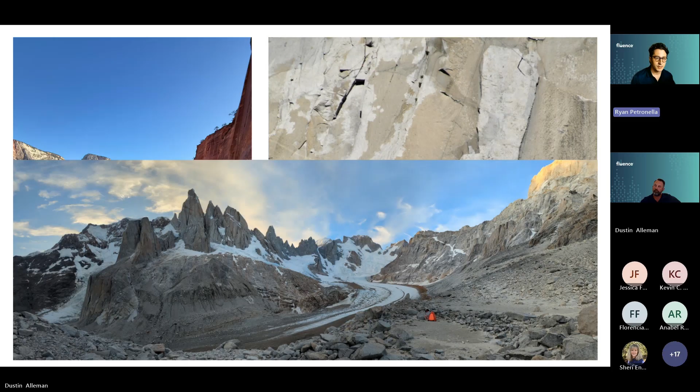The next picture is from down south, Patagonia, looking at Cerro Torre in the Torre Valley. I spent about a month climbing there in January a couple years ago. Next we have a picture from Chamonix, doing an alpine climb with Mont Blanc in the background. Finally, a picture of my girlfriend Lana and I from last summer with the Chief in Squamish, Canada, in the back. I really enjoy rock climbing. It's taken me to a lot of awesome places, and I know everyone on this call has their job, but outside of work, I find climbing really fulfilling, and that's what I enjoy doing.

Thanks, Ryan. Well, Ryan's a hard act to follow, he's kind of working on Most Interesting Man Alive, so I'm a little more boring. I'm a girl dad, in my dad era. Most of my time is spent doing kid events and sports. But when we do get free time for a vacation, we generally go to where my in-laws live, down in El Salvador, and get to enjoy some fishing and activities down there, which we don't get to do as often in Tennessee. So nice to meet y'all.

So we're here to talk about the MABR. I thought at the beginning of this webinar it would be best to try to explain it as a product, and then we would work our way into a solution.

The MABR that Fluence provides utilizes a flat sheet membrane. In this picture on the right, you have the flat sheet laid out, a little over 850 feet of membrane laid out on the ground. What we do is take a membrane, cover it with an air spacer, and put another membrane on top. We weld it together around the perimeter of the sheet to create a void for the air to pass through. The air will eventually diffuse into the wastewater, and we'll get to that in a bit.

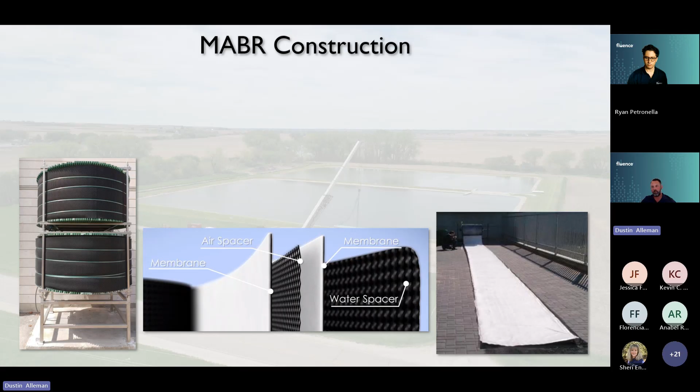So there's going to be a little bit of a recurring theme on my side. I apologize, but I want to make sure that if I get anything right out of this, it's that you hear the word membrane.

Initially, most folks know what membranes do, and those are used as filters. They're used as ways to physically create a barrier to promote inlet water of some quality to an effluent water of almost pure quality.

In this process, we're not doing that. I mentioned before, we're putting air inside that sleeve that we've created with that air spacer, and we're using the membrane as a surface to promote biofilm growth.

The biofilm that we're growing is a nitrifying biofilm. It only grows to roughly 200 microns at max, and it doesn't have the stability to continue growing. So we end up with a condition of a membrane application that's a terrible condition in the traditional sense, where it's covered in biofouling, and that's exactly what we want, versus the traditional method of a membrane needing to be clean.

So with that growth that we're promoting, it's a controlled condition for the thickness, and a main point operationally speaking for the membrane is that there's not an intent to need to clean it. There's not a maintenance mechanism to this.

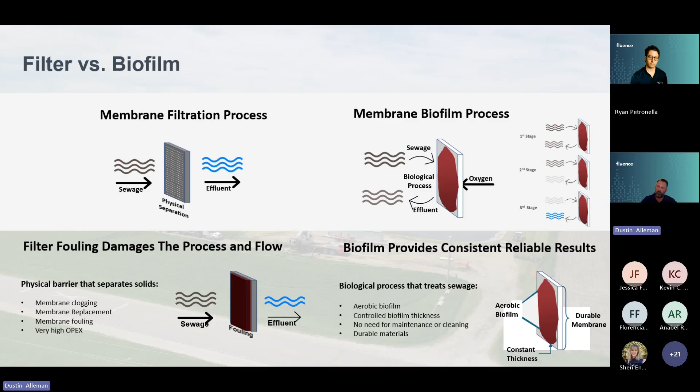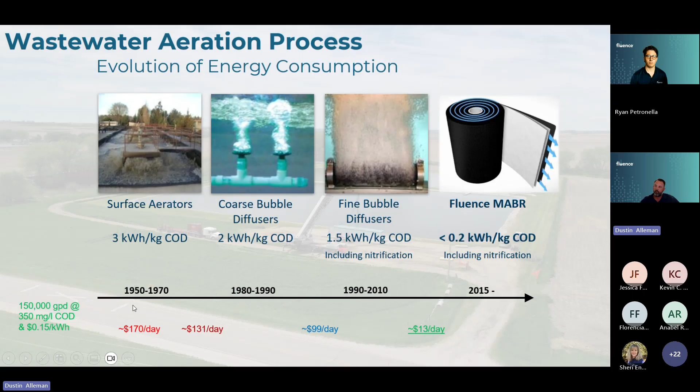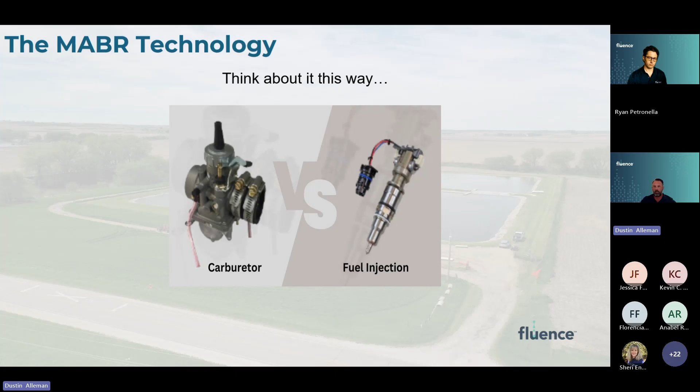So we went over the components of how we put this together. Part of what we should also go over is how the air flows through this. As I mentioned, we have the membranes, we have an air spacer, we have the water spacers. They're wound up into what we call a sushi roll here.

We're introducing air on one side of that sleeve and letting it exit on the other side. It's a very low pressure scenario - we're less than 1 psi within those membranes.

A key to the low pressure is that airspace that goes in between, because we've now physically made a void with that airspacer where no matter how deep we're submerging these towers, we don't need to overcome the hydraulics of the mixed liquor we're putting them into.

I did mention that there is intermittent scouring that goes on to displace all the fluid that's been treated with fresh, raw water, kind of like an airlift, just replacing with water that needs to be treated.

So we are growing our nitrifiers directly on that membrane face, and we get into a differentiator from an RBC technology where you're growing a heterotrophic biofilm that requires frequent cleaning and gets lots of buildup, versus a stable environment that's not intended to be maintained as long as you're following the treatment targets.

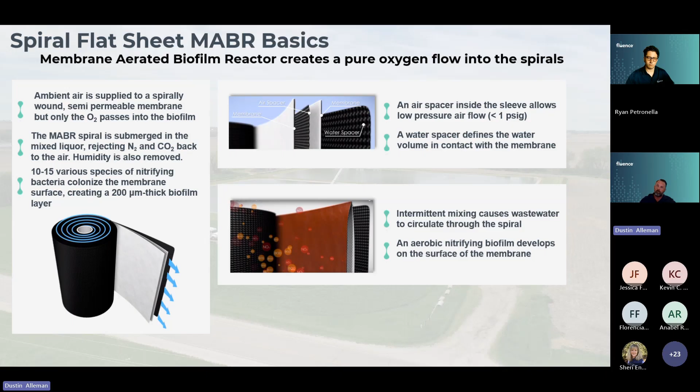Just a quick little visual. If you look at this line here, that would be the membrane face, and if you can imagine there's another one on the other side, so you can see the oxygen flowing between those two sheets of membrane.

We're growing a biofilm here on the face that's specifically for nitrifying ammonia. That ammonia is now going to be converted into nitrate in our suspended mass, which is where our heterotrophic growth is. And from the nitrate, we're converting the BOD as a carbon source to make the nitrogen off gas.

So on the membrane face itself, we're taking care of all the nitrification, and once we get into the suspended mass surrounding that vessel, we're getting into the denitrification component. So we're able to achieve both within the same basin.

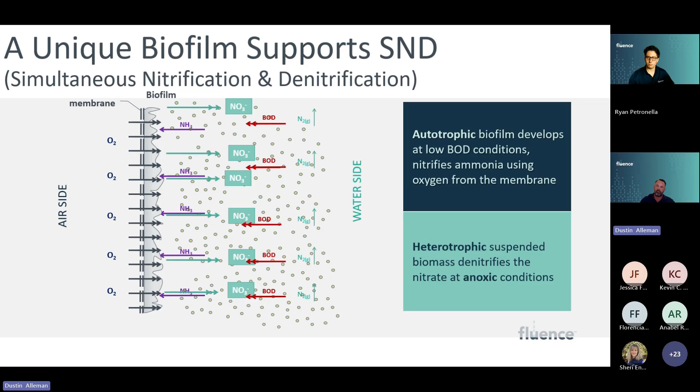It's an interesting technology because there's a simplicity factor to how this works and how we apply it to the MABR plus the low DO process. But what it does allow us to do is be pretty flexible on the way we apply it, whether we're applying it to a package plant, to a large conventional plant, or as a side stream treatment.

The MABR itself is the primary mechanism for that nitrification piece, and the supplemental processes we do behind it are where we get our denitrification. But it allows us to fit it into a bunch of different types of application variations.

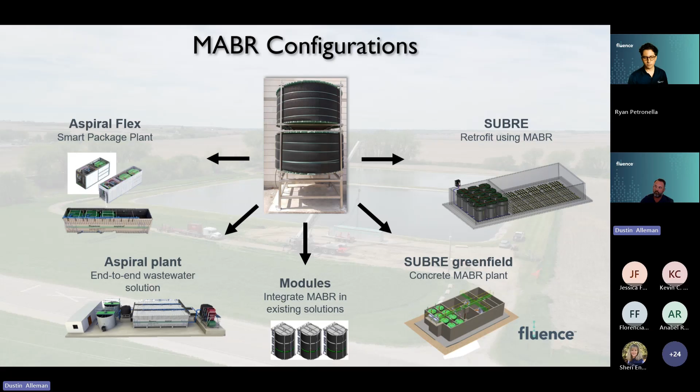Laying out a general overview of the process - depending on how much phosphorus you're needing to remove is kind of how we select this anaerobic basin. Not dissimilar to a lot of other technologies where it's a time mechanism, but what differentiates it from other options is we've removed all the internal recirculation streams aside from the RAS, so there's no internal nitrate recirculation, which does allow for the protection of this anaerobic zone from getting commingled nitrates introduced to the EBPR process.

But from that point, it's anaerobic. This MABR zone is anoxic, and then you have your aerobic zone. That zone, particular to the Fluence process, we're running at a low DO to promote that denitrification and the remaining nitrification needed.

And the point where we decide to stop adding MABR towers and go to fine bubble diffusion in the zone is really just an economic choice, where the MABR's cost is outweighed by the efficiency of the fine bubbles following it.

From an operator standpoint, while it's in the field deployed, this is very similar to a normal condition at a conventional wastewater plant. The way it's flowing through, there's not a lot of levers for someone to have to operate and need to configure, and you're not in the position where you have 10 different variables where you need to make your adjustments.

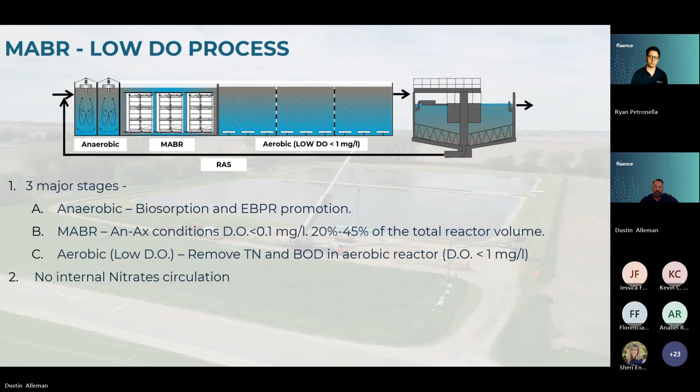What's also interesting about this, since it is a simplified process, is we're able to containerize a lot of these technologies and use them as building blocks to go after applications in a different way, where a small application can get at or a little below 2,000 gallons a day out of a 20-foot container. You have an entire treatment plant that fits within that small container, and you work your way up into different sizes for different flows.

We've taken a modular approach where we can break out different variations of application, being more agnostic to what does go in, whether it's a clarification process on the back end, putting an MBR on the back end, or the amount of towers we need within these basins. This large MABR can have anywhere from 1 to 5 towers, and the medium size can have 1 to 2. It allows us to be extremely flexible per the application.

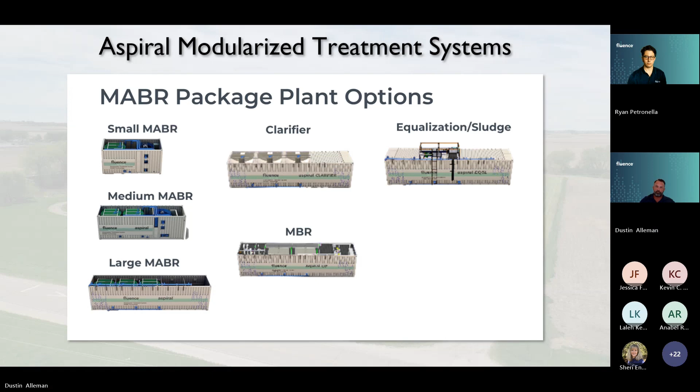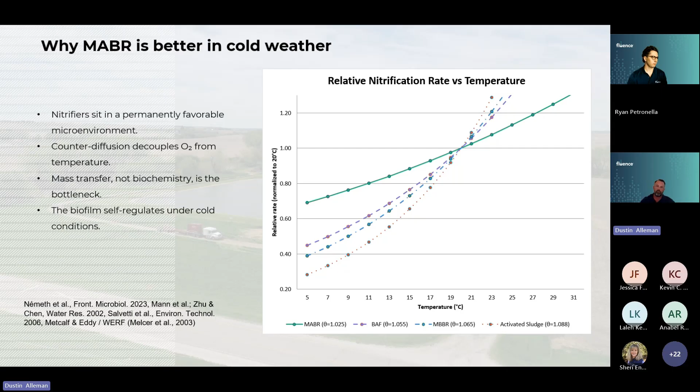As conditions change, with a quick warm up or cool off in the water seasonally, you're not having to make large adjustments constantly to chase the temperature up or down. It's more of a slow, controlled movement through it.

On the product side, the big things to note for me are that when looking at an MABR, the membrane mechanism is a diffuser, not a means of filtering. The nitrifying biofilm is a stable, controlled growth that doesn't require cleaning or create operational challenges, and there's stability of the treatment method across varying temperatures.

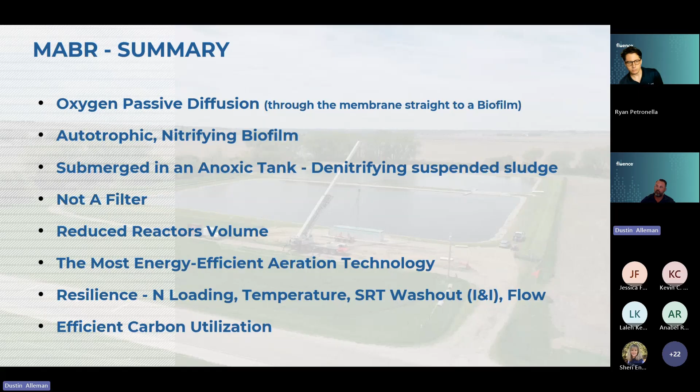I'll hand some of this off to Ryan now.

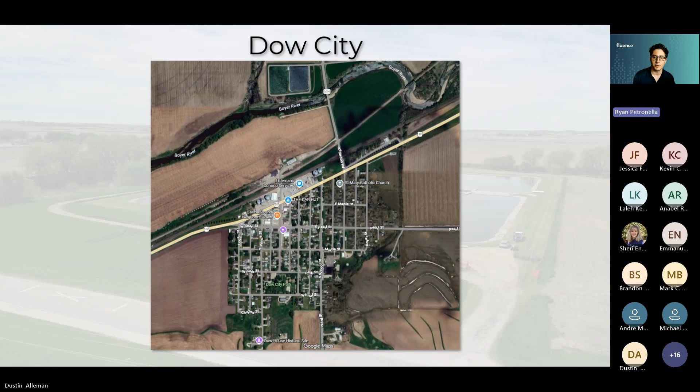Thanks, Dustin. So we wanted to present a case study today. We're going to talk about Dow City, which is a small town in western Iowa. For those not familiar, it's a small point on a map. The town's just under 500 people population, but they had some treatment challenges with new updated flows that we'll review.

The problem we have in Iowa specifically is that Iowa has the most wastewater lagoons out of any state in the U.S. Of more than 700 lagoons in Iowa, 500 are controlled discharge lagoons, discharging twice a year, typically spring and fall. 200 of those are continuous discharge, discharging year round.

The challenge Iowa's facing in particular is that most of these lagoons were designed specifically for BOD, TSS, and pH, removing those constituents and regulating pH. The DNR a few years back mandated new requirements that included ammonia and E. coli, and the problem was that most of the solutions out there are very capital intensive.

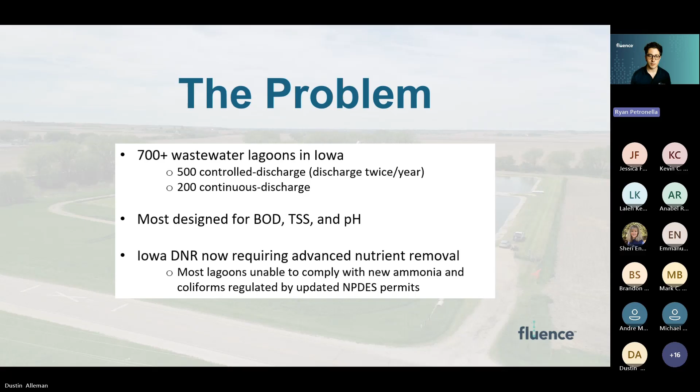And this city, Dow City, we were just talking about, is a small town with a small population. A lot of these rural towns simply can't afford these large capital intensive solutions that are out there. So let's go over the basics of a lagoon.

For those unfamiliar, your typical lagoon is basically an excavated hole in the ground. It's older technology for wastewater treatment, relying on wind or air, in addition to photosynthesis from algae producing oxygen, to introduce oxygen into the wastewater. The wind moves across the water, and the algae takes sunlight and converts carbon dioxide into oxygen. That's how a lagoon introduces oxygen into the system.

You then have aerobic bacteria working to remove the BOD from the system, and typically these lagoons have long retention times. Dow City has 2 cells in its lagoon, each sized for about half a year's worth of retention time. So basically you're requiring long retention times in order to remove that BOD.

The challenge is that with these new updated ammonia requirements, what we're seeing is that a lot of these lagoons are failing, specifically in the wintertime, failing the ammonia removals now required by the DNR.

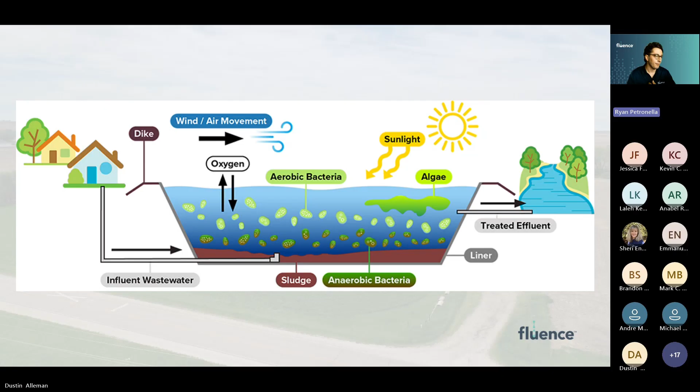I saw that Nathan was on the call. Nathan Seberg, he's in the bottom right corner. Him and Craig basically brought us this project a few years back.

We met Dr. Craig Just at a WEF conference. Craig was given a grant from the state of Iowa to pursue alternative options and look into new innovative technologies that could be a solution for small towns like Dow City. With the help of Nathan, who provided a lot of these photos, he helped with the installation.

We've basically been piloting this technology in Dow City for the DNR's approval, which we actually just heard recently that the facility plan was accepted in Dow City, and we're excited to be one step closer to gaining our full approval of this technology in Iowa.

Next slide. So again, the cost issue was a problem. We had ISG, who's a large consulting engineer in the Midwest, take a look at this project.

When they were looking at costs for Dow City, they analyzed our solution against two other solutions, a submerged attached growth reactor, as well as a covered aerated lagoon. And as you can see from that table, we came in significantly cheaper from a capital perspective on installed cost, on what that would look like to basically provide this town a solution.

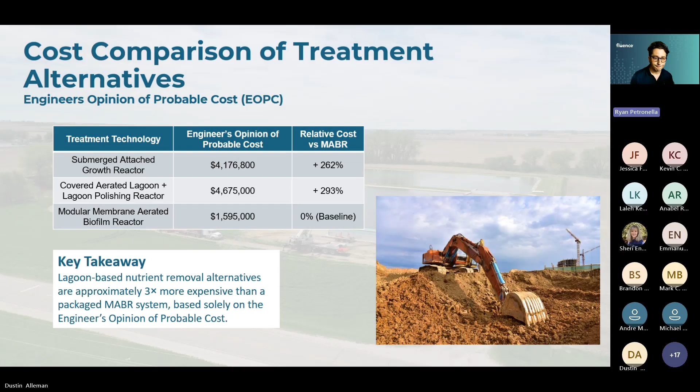All right, next slide. So the system that we have installed at Dow City is an Aspiral M2 Plus. Just a quick note on the nomenclature there. M stands for medium, so we have our S, M, and L series: small, medium, and large. The M series maxes out at around 30,000 gallons a day hydraulically.

The 2 denotes that there's 2 MABR towers in that container, and the plus just means that we have a media filter on the back end. So for stricter effluent requirements, typically when we're targeting 10-10 BOD TSS, that's when we can include a media filter to achieve those effluent requirements.

Next slide. So real quick, we're going to just look through some pictures of the pilot that we have installed there, starting with the installation. Next slide. The idea of showing you all these pictures is just to showcase how efficiently and relatively easily we're able to install one of these systems.

You can see the 2-cell lagoon there in the left photo, and some excavators pushing dirt. That's at the end of March 2024. So just keep in mind that's sort of when we're beginning this install, at the end of March.

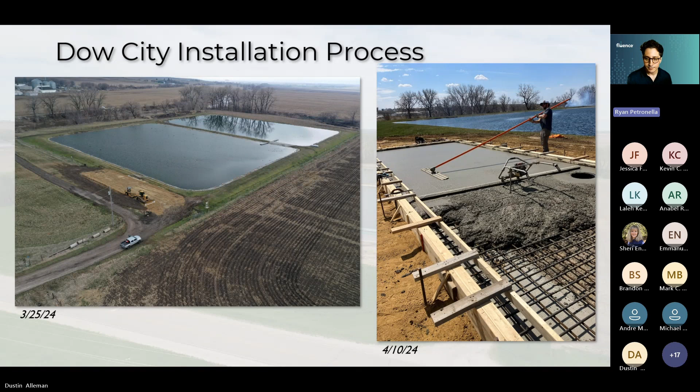We performed the lift early May, so just over a month after they started pushing dirt. It's a 40-foot high cube container. We do custom design and fabricate these to be watertight containers. These aren't repurposed freight containers that you might be used to.

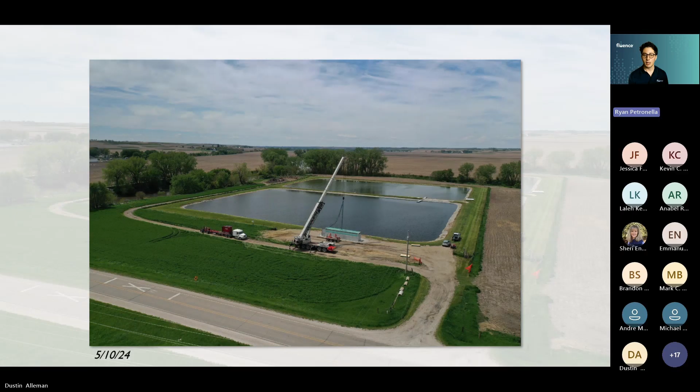But for a contractor, these 40-foot containers are easy to understand. Any contractor will understand how to perform a lift or how to move these containers around. Makes it really easy to do an install like this. Next slide.

It took a day and a half for them to construct a building. Because of the really cold weather experienced in Iowa, or for any application rather, it's important to think about protection for your operators and just protection of the equipment.

So the decision was made to basically house the container inside a building. This building went up in a day and a half. So really low cost building, but provides great shelter and great protection around the unit. And you can see there, that was the end of May. And now here we're at the beginning of June.

They've plumbed up the interconnecting piping. You can see the dock just off of the building, that's where the feed pump is located. And we're treating water early June. So that was basically end of March to early June. It's about a 2-month install for this whole process here. Next slide.

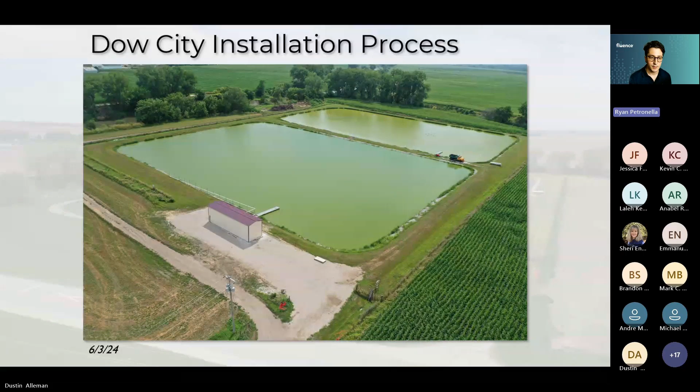Okay, so now we're going to talk about some data that we've received, and just show how we're able to effectively remove ammonia during the cold winters that Iowa experiences.

We started out with the startup, just leak and aeration tests, filling the containers with water, checking for leaks. That's just part of our startup.

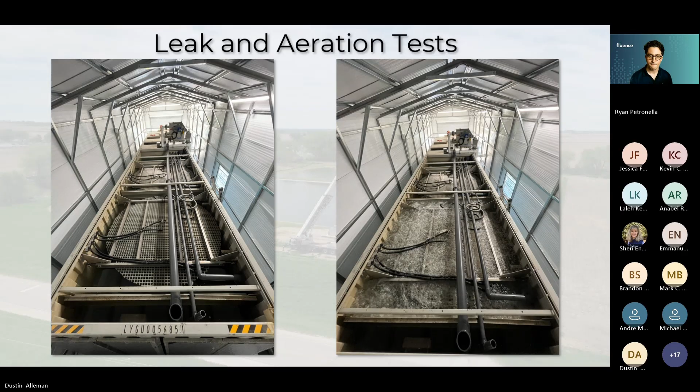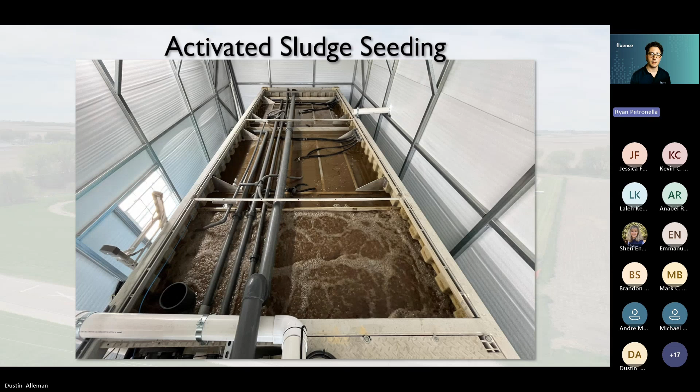We typically like to seed our systems with sludge. That looks like basically organizing a vac truck, working with some local municipal wastewater treatment plant, getting some of their activated sludge and introducing it into our system and recycling it. That basically introduces biology to our system. That biology will then latch on to our membrane and start to grow. That's where we start building our biofilm.

So you are what you eat. The idea with this is to show how we really have operated the Dow City pilot in two completely different biological ways. This first way we're going to talk about is a biofilm-only process.

The dock you see there is located at the perimeter of that lagoon, and these lagoons each receive fresh wastewater from an inlet pipe that deposits the water about in the center of each lagoon. So imagine, these each have about a half a year's worth of retention time. You're depositing that fresh wastewater in the middle of these lagoons. We're feeding our system from the perimeter of the lagoon. So there's a lot of time for that algae in the lagoon to basically act on the wastewater.

What we found initially treating the wastewater was that we had really diluted influent, really low loadings as far as ammonia and BOD were concerned. And basically what that resulted in is us operating in a biofilm-only process.

So you can see here, we just seeded the sludge. Our SSV was quite high, right around 700. But over time, because of the low nutrients that we were feeding the system, we actually lost our sludge. We lost our MLSS in the system. Two months after, in August, we essentially have almost a clear, zero SSV. We're basically just passing this semi already treated wastewater from the lagoon, from the algae, into our system.

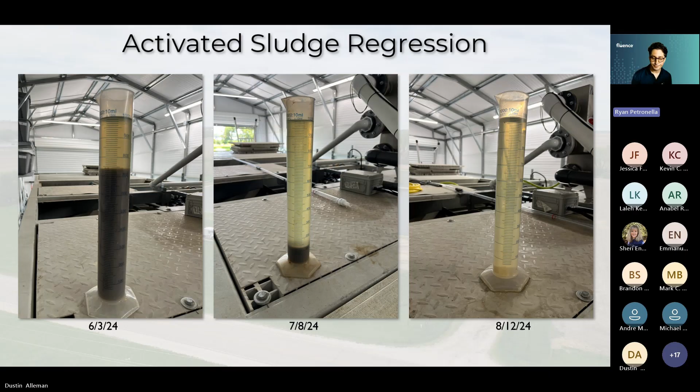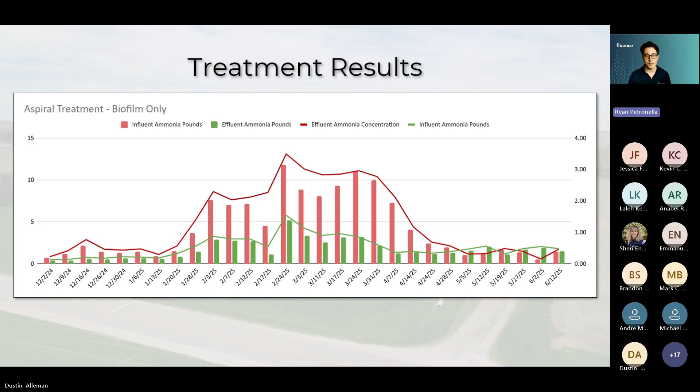What you'll see is that February, March are the coldest times of the year when this lagoon is actually under a sheet of ice. We have regularly really cold wastewater temperatures during this time. Ammonia, which again is not specifically targeted by that algae or by the lagoon, we're still introducing ammonia into our system at lower concentrations, but we're still seeing upwards of 10, 15 milligrams per liter of ammonia. And we're able to effectively remove that ammonia down to the levels required by the DNR.

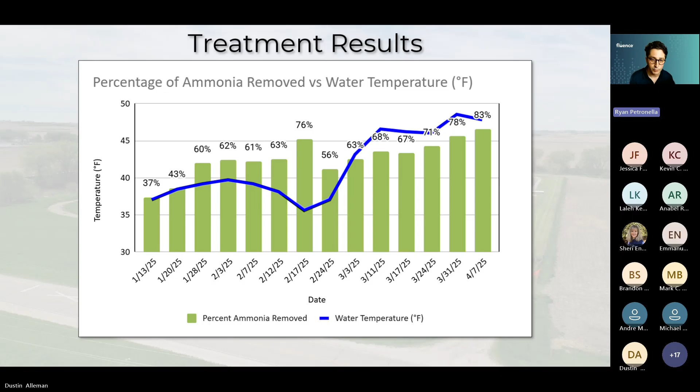After obtaining all this data, I had the idea of installing a baffle to essentially change the feed source. Earlier, if you remember, we had that dock right off of the container. The idea was, hey, let's try to obtain data and show the DNR that we could treat full strength waste. Since it was still a pilot, we could not pull directly from the influent lift station. So the next best thing we could do was try to intercept that wastewater while it was still full strength before it had the opportunity to interact with the algae and the rest of the lagoon.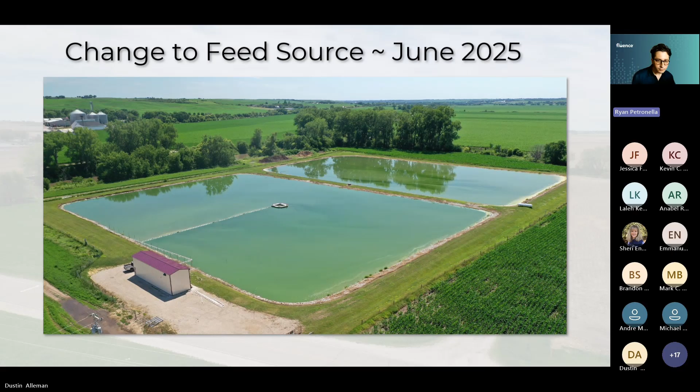That baffle you see in the middle is actually a floating dock with rubber sheets all around and a chain that holds it down. The idea was to position this over that influent pipe that feeds the lagoon system. So from earlier, when we were working with that biofilm-only process, now we have these feed pumps essentially intercepting the wastewater while it's still full strength, before it's been treated by any biology, and directing it straight into our system.

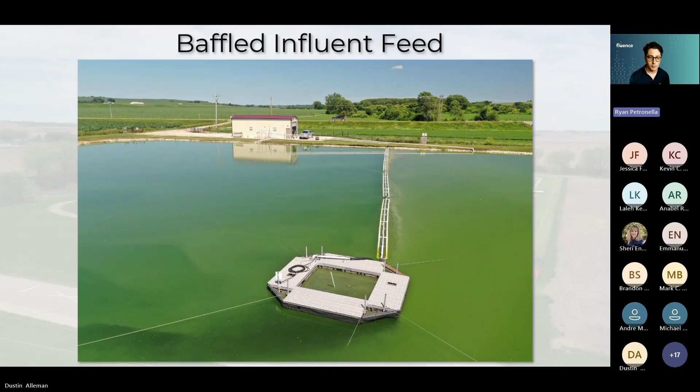You can see here just the black color inside that baffle. We found that this portion within the baffle quickly became anoxic or anaerobic. We're basically dealing with raw wastewater, so that's what you would expect.

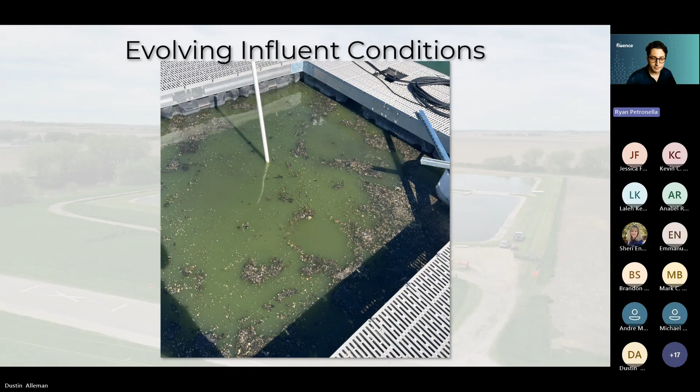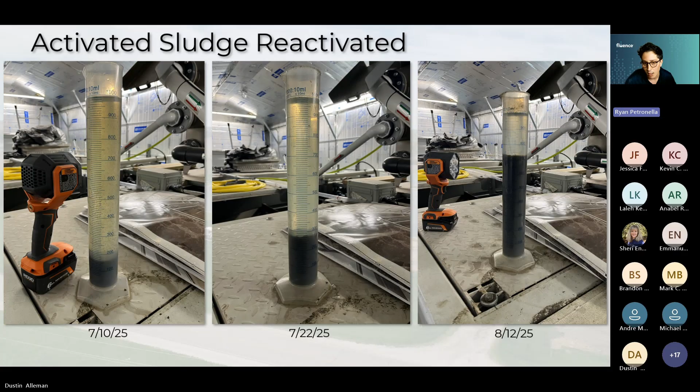After that baffle was introduced and we started pumping from the baffle, you can see over the course of a month we're now starting to build sludge back up into our system. We're going from a biofilm-only process to an activated sludge process. The SSV starting out mid-July is about 150, and by middle of August we're back up to around 700, 750.

Now with the baffle, we're actually seeing ammonia concentrations consistent with what you'd expect in typical raw municipal wastewater. And our ammonia concentrations in the effluent actually improve, in the sense that we're removing ammonia even better as an activated sludge system, which is how the MABRs were really originally designed. We designed the Aspiral systems to work as an activated sludge system. This was sort of a pilot for us, just to learn how it would look if we ran it as a biofilm-only process as well. So what we're showing on this slide is just how we're able to accommodate both those different conditions and still reliably remove ammonia from the system.

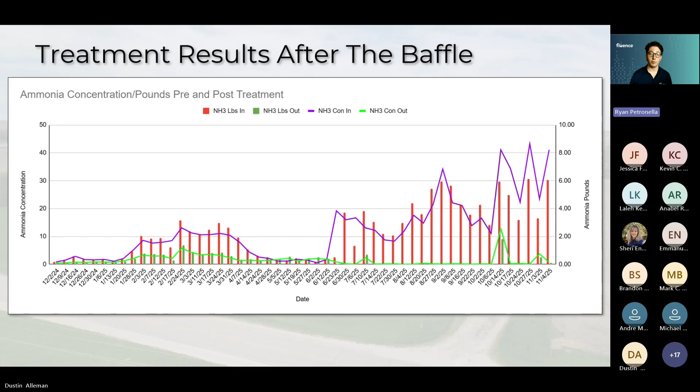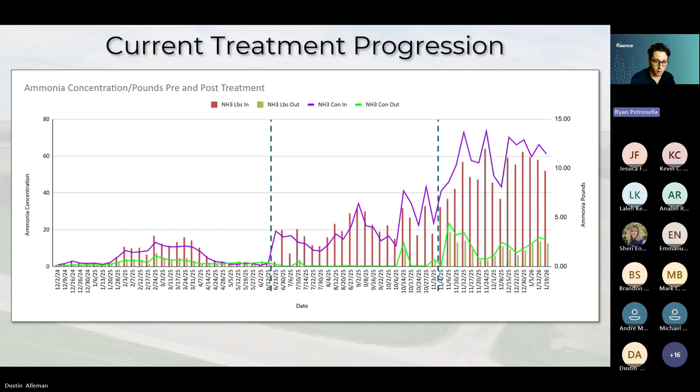At that point in November, the two dotted lines you can see here - the first dotted line on the left signifies when the baffle was installed. The second line in November is when Nate suspected the baffle wasn't quite positioned correctly, or might have been slightly off center from that actual influent pipe. So he went and moved it, and what you can see is we're actually, from November 25 on, receiving even higher levels of ammonia, all the way up to 60 milligrams per liter. So just three really different sets of data for different ammonia concentrations and conditions, but with all three of them reliably removing ammonia.

Finally, I just wanted to present some data we got back from the lab. You can see here that in addition to BOD and nitrogen, which is what our technology addresses, that's why we're pursuing this market in Iowa. I'm really excited about working with these lagoons to remove BOD and nitrogen.

We also are seeing that we're really removing pretty high rates of phosphorus as well. That's through this EBPR process, where essentially the bugs in our system are absorbing the biological phosphorus, and ultimately that ends up in your sludge and is removed from the system when you remove your WAS. We basically have data here to show that we're able to consistently remove BOD, nitrogen, and phosphorus in a variety of different conditions.

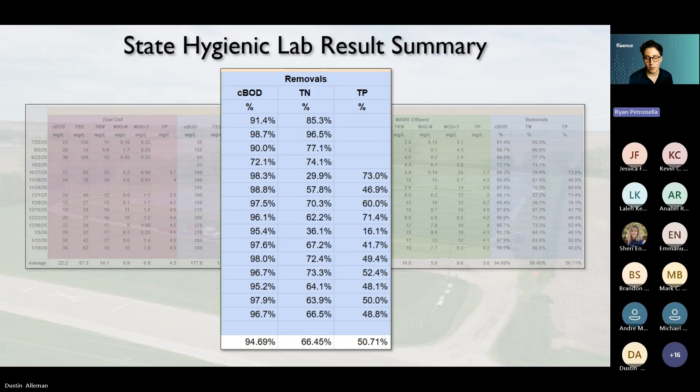All right, back to you, Dustin. Okay, thanks, Ryan.

From a power consumption perspective for the application Ryan was just reviewing, what we really drove down to on this was we're roughly about $5 a day average for this 30,000 gallon a day plant. So to make an analogy for the power consumption, you're looking at similar to a single family home to run this plant. Really, the uptick in power usage has been attributed to just turning on the heater in that building.

To get that room above freezing - it's not a room that's kept up to a normal temperature like inside the house, but we do need to stay above freezing. We've made an analogy to a higher utility rate since Iowa does have lower energy rates, but it's still under $10 a day.

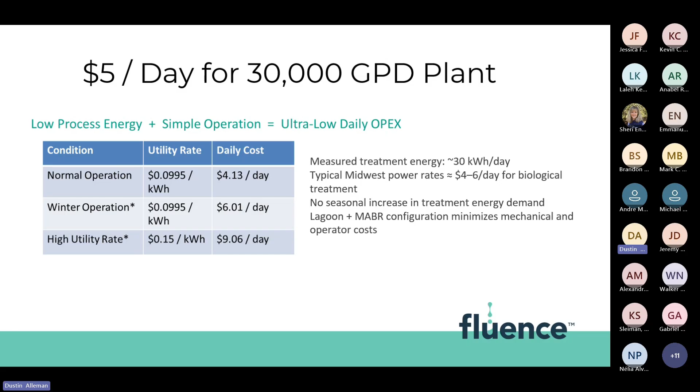From the perspective of temperature, we've got a write-up that Black & Veatch has verified some of our treatment approaches at one of our larger conventional plants in Israel. One of the key things that came out of this review, which they've tabulated here, is the reduction in volumes for reactors and clarifiers. Some of the magic of the MABR is the reduction in volumes required to perform the treatment.

At 15 degrees Celsius instead of a 7-day SRT, we're drifting to 5. When we get to a higher temperature, kind of on that chart I showed earlier, as you go up in temperature, the technologies become near par for nitrification processes. It does transfer over to the bioreactors and clarifiers as well.

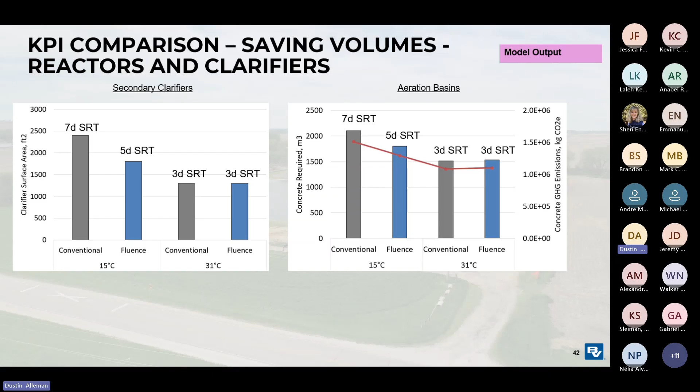What doesn't go away is the energy savings. Similar to conventional wastewater treatment, there's a stability between seasons of cold to warm, where you're using similar amounts of energy to perform that treatment. But what you do see is the stability and reduction of energy using that MABR.

Coupled with that low DO process, we get the full energy savings, where we're reducing the bulk aeration, replacing some of that bulk aeration with the process air that I talked about before—the air we're pumping through the membrane that we already discussed. But you also can see a very significant removal in pumping, and that's part of the internal recirculation loops that we're able to remove from the treatment process entirely.

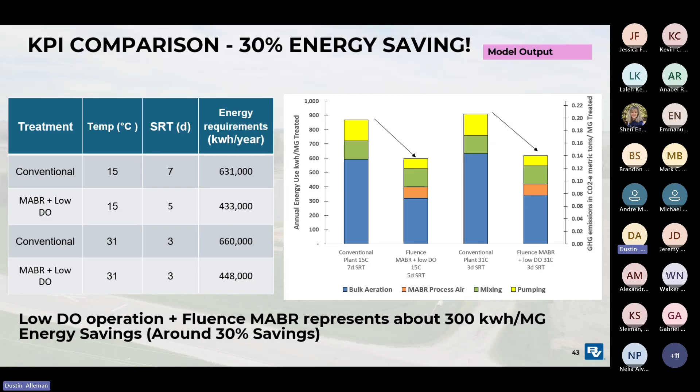And from that point, that is the end of my end. Ryan, you have any summary comments you want to go through?

Yeah, if you throw on the next slide, just wanted to show... an overview of this equipment and the advantages we're seeing, specifically around Dow City, but just in general.

We talked about the speed of installation there. This was a 30,000 gallon per day plant that we went from moving dirt to treating wastewater in a matter of 2 months. We talked about the cost competitiveness of the system, how we had ISG, a prominent consulting engineer, look at a few different technologies.

We came in less than 50% of the installed cost of what our competitors were doing. From a pre-engineered design standpoint, our approach allows us to understand our costs and basically provide these systems at a lower cost to our customers.

The total nitrogen removal—we talked specifically about ammonia removal in this webinar, but the technology itself is great at those projects that do have a low total nitrogen requirement, when you're also required to remove nitrate from your wastewater.

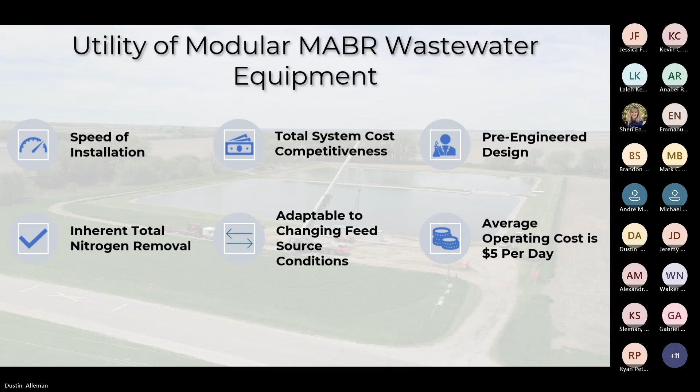I think from that point, we're good for questions here, Jessica. Yeah.

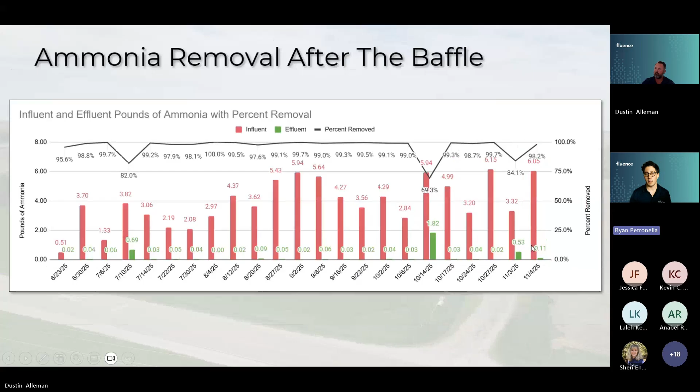Mark, the algae in the lagoon - the only real negative that we saw from the algae was actually within the media filter. The media filter that we include on the back end, we were finding that it was just basically clogging with the algae. We were basically taking in so much algae to our system and running it through the media filter that it was backwashing so frequently that the operator actually decided not to utilize the media filter. We did find that once the baffle was constructed, we're basically able to intercept that wastewater before algae was introduced to the system, so at that point we're able to essentially use the media filter again.

So to your question, Laleh, about the temperatures and the minimum temperatures - our standard process calculations or designs will typically design for a low temperature of 8C. We recognize that we just presented data of ammonia removal at 2.5 degrees Celsius, but I'm not sure that we have data specifically around 1C. We do tend to design around a low temperature of 8 degrees Celsius.

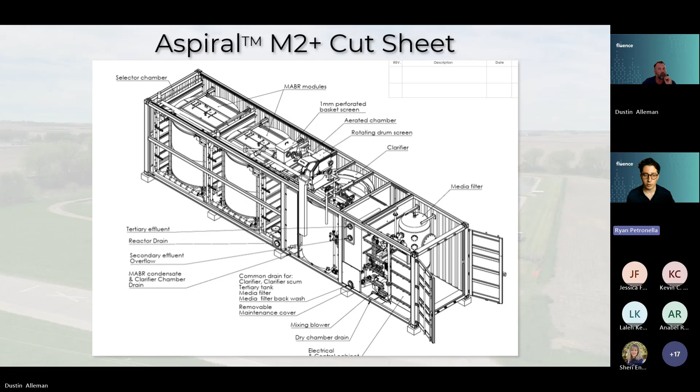And as far as if it's size based, absolutely - we'll consider the flow rate of a system, we'll consider the design temperature, we'll consider the loadings. All that goes into our process calcs to determine what Aspiral best suits that project or that wastewater. And for those larger projects, yeah, we're looking at those SUBRE installations where we're installing those towers in a concrete basin.